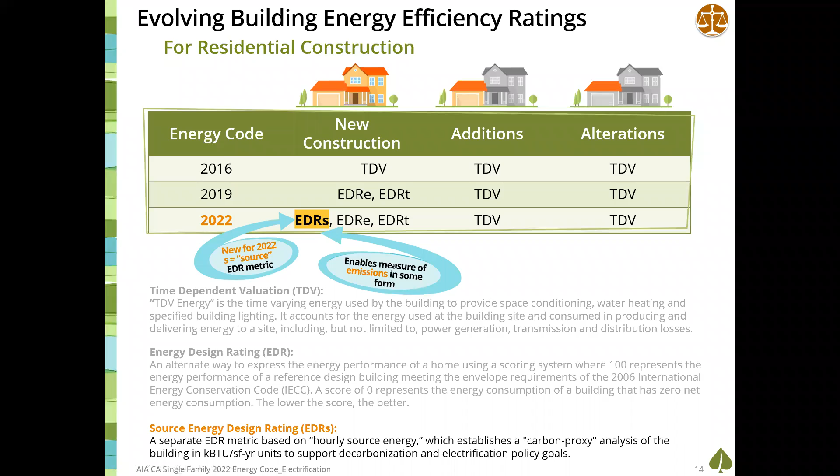So we want the right type of energy source being used with the right allotment that makes sense to a standard design, because that's what we're always being compared to when we use the performance approach: a standard design that represents your footprint, the location where the house is located, but meeting all of the prescriptive requirements spot on, and its associated efficiency metrics and source energy metrics of that standard design, in which it's just beautiful according to the energy code.

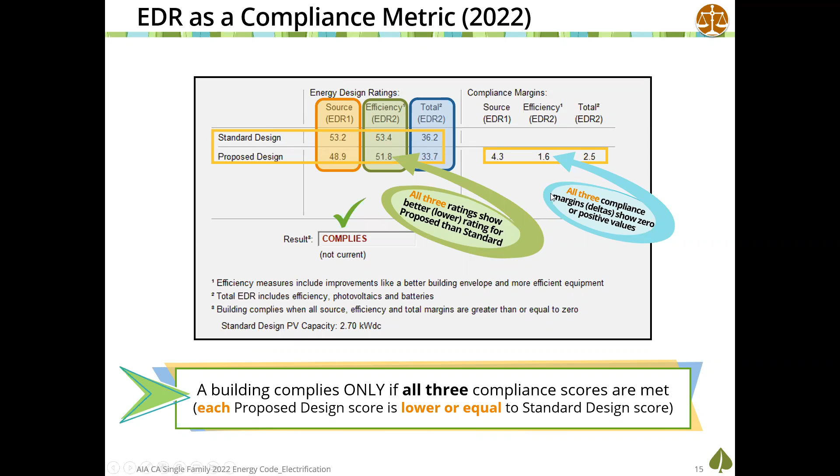So these three buckets are going to have to show compliance for that report to say building complies. So I might be passing with source energy and efficiency energy, but my total energy, which takes into account renewable energy sources on site, might not be passing. Then great, you did great with source energy. You're not using more than you need to, and you're using a source that has a low carbon footprint. Your efficiency is amazing. You have great windows, you have great insulation, but you don't have enough PV. And that is going to not be a building that complies to the energy code with this next code cycle. So there's layers associated with showing compliance for new construction in the next energy code.

I want to get a good idea. What is that climate zone? What is the energy code looking at in terms of efficiency measures and PV sizing that I need to consider before I start designing this home? So great tool out there. I hope you guys are using it already. Such a fun tool.

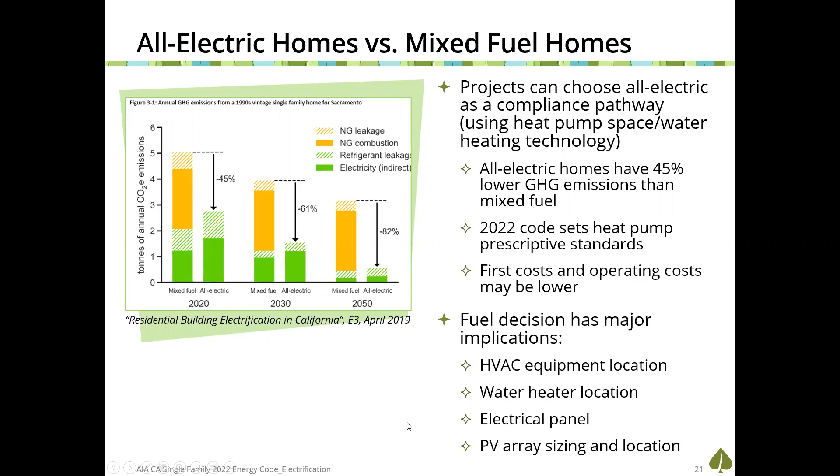And when we make decisions about our design, we need to consider fuel sources and the appliances, because you're about to see how it's going to affect how you design the building. So let's talk about what the prescriptive requirements are for heat pump water heating. It varies on climate zone. So here, all of California, the desire is to go to heat pump water heating. But there are some, shall we say, leniency measures associated with, well, if you want to use some natural gas, we'll talk about, well, what climate zone are you and what's that source? What are you using it for?

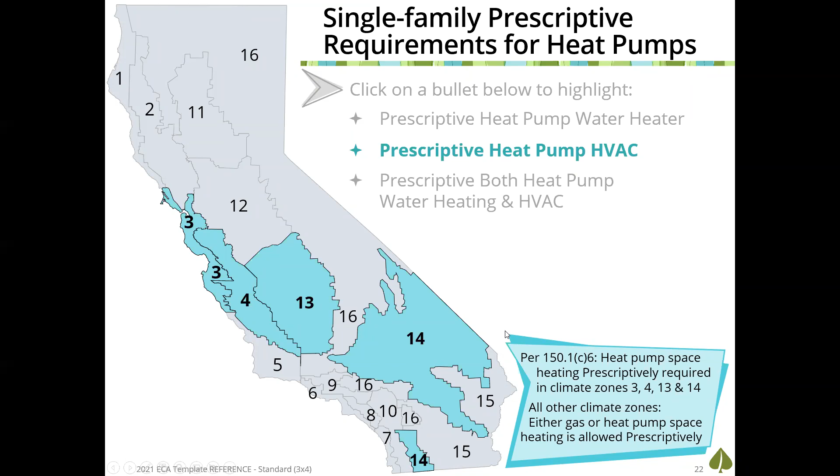And you will see here that in climate zones 3, 4, 13, and 14, which I've highlighted in a lighter blue, you can use gas tankless water heating in those climate zones prescriptively if you so desire, as long as you're using a heat pump space heater. You will see that heat pump space heaters are only prescriptively required in those climate zones, so you get some flexibility for water heating because you're using a heat pump space heater.

You know, Rebecca, someone's not muted, and it is causing a little bit of background noise. If we could just make sure everyone is muted who does not want to speak out loud or have us hear their background noise, that'd be great. I'm getting a little distracted, sorry. Bright, shiny noises.

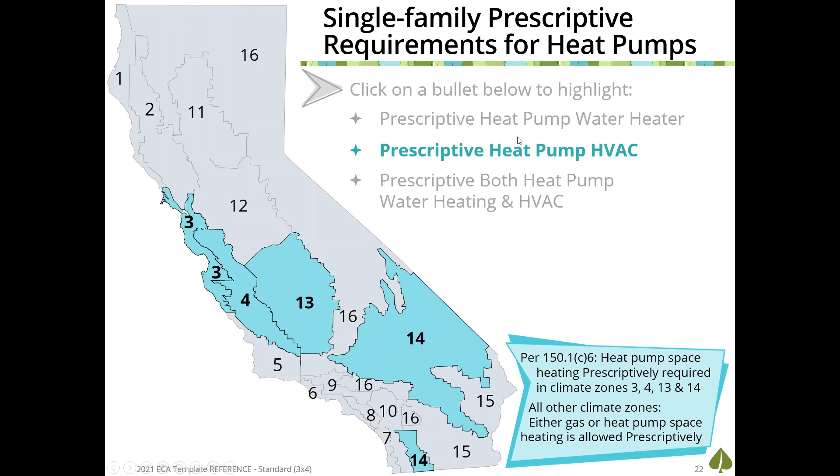So in climate zones 3, 4, 13, and 14, space heating is prescriptively required to be heat pump. And if you go there and you don't do a performance exception to that heat pump space heating, you do have the ability to look at using gas tankless water heaters if you so desire. Oops, I didn't mean to do that. That particular slide has some funkiness to it. Looking at both using prescriptive heat pump water heating, which we'd like to have everywhere, but we'll give you some leniency in 3, 4, 13, and 14, depending upon your HVAC system.

Across the board, everything's going to look better in your performance calculations using heat pump technology because of your source energy metric that's associated with this next code. So someone asked a question, what is the source of the electrical power? There's not enough now.

So our utilities have their own goals they have to meet, set by state code, of what their portfolio looks like that's generating electricity. And we've all seen that we've had some strains on the system as we've been converting our system to more of a renewable energy source so that electricity is green and it's not burning natural gas as much, because we still do have quite a few natural gas plants here in California, but the utilities again have their goals to start converting those and providing more energy sources to their portfolio that have no carbon footprint.

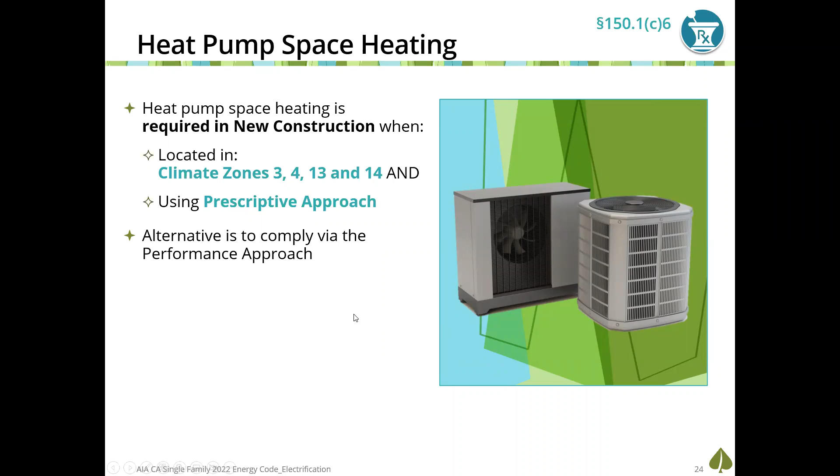Let's talk a little bit deeper about those heat pump space heating systems. As I said, in climate zones 3, 4, 13, and 14, they are going to be prescriptively required, but across the board, when you use the performance approach and you want to use gas space heating, it will affect your source energy metric. And one of the tools that they have given us, and it actually happened mid-code cycle for the 2019 code cycle, is a variable capacity heat pump performance compliance option.

And I really wanted to talk about this with you guys about design considerations, things that maybe you might want to do some research in and find out more about, because for these variable capacity systems that meet a very specific design criteria, and here's our design criteria that has to be met, each habitable room has to be directly served by a ducted or ductless indoor system.

All habitable spaces that exceed 150 square feet are going to have a thermostat that controls the environment of that space. So we have to be thinking consciously of what's a habitable space in my building, what is a non-habitable space, what's the size, and how am I giving it its own control system of how it's maintaining its temperature. And this entire thing is verified by a HERS rater.

But going back here, this credit is only engaged in the performance approach, and it's pretty humongous. I gotta tell you, I've been able to provide a lot of compliance flexibility for projects by looking at a variable capacity heat pump system, which is most commonly provided via mini split systems. So really look into mini split systems and variable refrigerant flow systems. So there is technology out there that is pretty amazing, and it's not expensive.

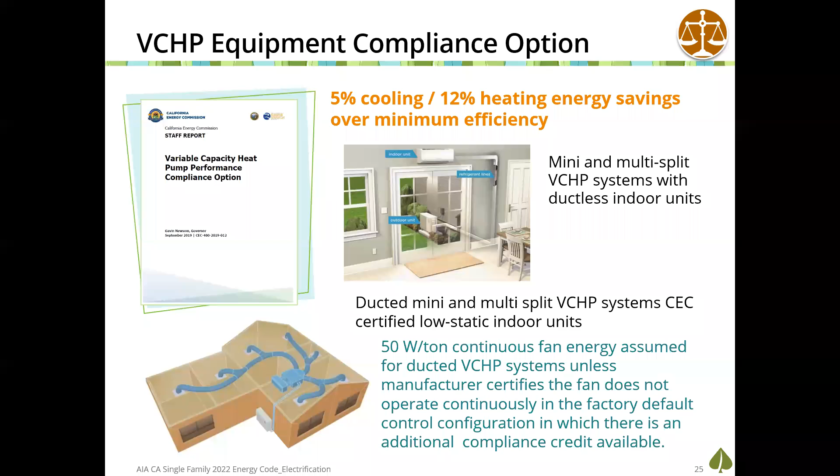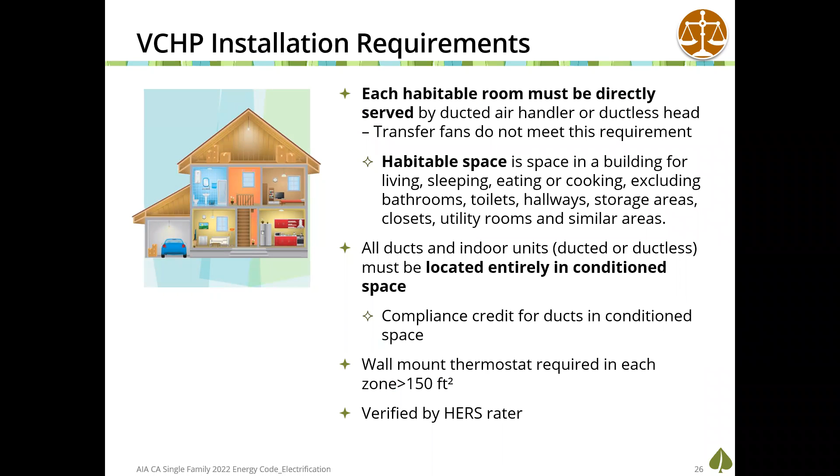It's not like a hydronic space heating system in which I've got warm floors throughout my entire house. That's a pretty expensive system. This isn't, because of its ability to spot cool, shall we say, specific rooms when the people in the room go, hey, I'm setting the temperature because I'm here in this room using it and I want to be comfortable. But I'm not sleeping in my bedroom right now, so I'm not going to set the temperatures there. I'm going to make sure those are temperatures in which I'm not using more energy than I really need to. So a really great tool that they've given to us under our belt.

A little bit more about water heating. There are many different types of heat pump water heaters, so you're going to have to do research on heat pump water heaters. 240 volt heat pump water heaters are what's really supported by the energy code, because it has a quick recovery rate. It can produce that hot water ready for that next person that's going to take a long shower quickly.

But there are a lot of people who are getting very concerned with how much load they have in their homes, and how can we think about the design of the loads of the home by taking into consideration, do we really need a 240 volt water heater? Maybe 120 volt will work, depending upon the desires of the homeowners of when and how much water they need.

The solar backup system. So this is a PV system that's tied to and dedicated to an electric resistance water heater. So I don't have any flue, and it's a pretty amazing system.

Does need to be an approved system by the Energy Commission, but I've seen some of these are pretty amazing, and I'm seeing them quite often used with ADUs. Now, you do have some exceptions to the heat pump water heater. Remember that if you want to go gas tankless and not take a penalty, in climate zones 3, 4, 13, and 14, that is possible, but that means you are using a heat pump space heater.

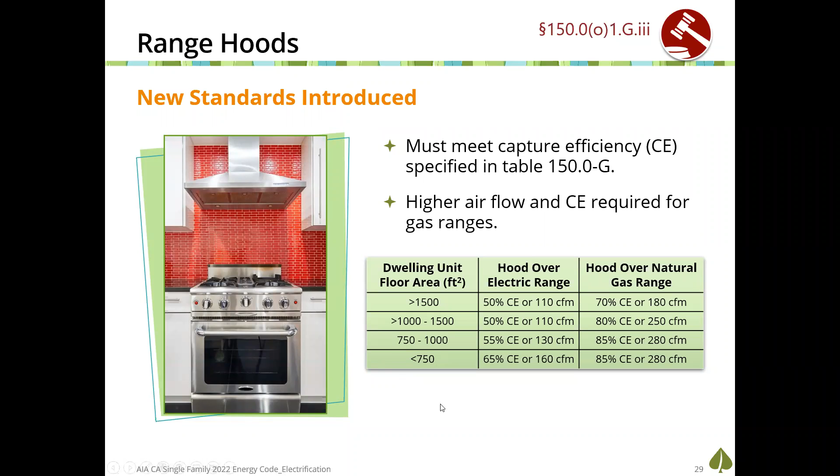We want to bring that air out. We want to flush out that kitchen with more air changes than if that same hood was serving an electric cooktop. So do be aware, if we're using gas cooktops, we will have alternative requirements for our kitchen hoods, which will require a higher airflow rating, which will be verified by a HERS rater.

Now, if you want to use natural gas anywhere in the home, let's say you successfully were able to go, I want a natural gas water heater. And I was able to, in that performance approach with increased building efficiency and so forth, and showing that my source energy is in compliance to how much I'm allowed, I pass. Yay. You do that with the furnace. You do that because you want a gas cooktop.

You have a gas dryer. But that means you're going to put in an electric infrastructure for future electric appliances. So if you're going to put in that gas tankless water heater, this is an issue. All of you need to be considering this.

You need to design into the home a 2.5 by 2.5 by 7 foot space that is accessible for a future tank heat pump water heater. And part of what you're also going to put in that 2.5 by 2.5 by 7 foot space that you reserved is the electrical infrastructure for an easy install of that heat pump water heater.

And if the space you reserved is within 3 feet of the water heater that's there, that gas water heater, you have one set of requirements versus if you decided to reserve that space greater than 3 feet from where the water heater is. And this is in part because the further away the water heater is from that hot water piping, you're adding more energy load as we have to flow through the hot water pipes longer to get the hot water to the source. So there is going to be a cost and a design criteria behind wanting to go gas tankless water heaters.

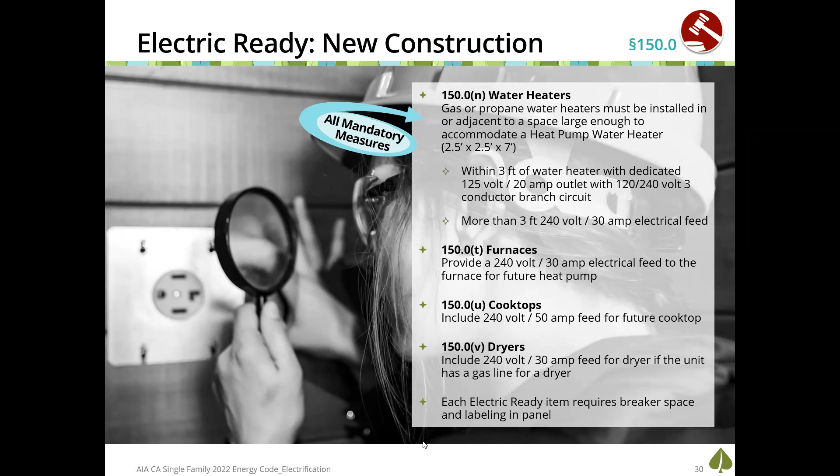So, being conscious of what does that mean to the electrical infrastructure of the home, to the service size to the home, and the cost. So the homeowner's paying for 2 services, gas and electricity. That's a cost. Is it a cost that they really truly are conscious of? Is it a decision they're making? And you, the designers, need to be helping support that.

So Emery's asking, how loud are the exterior components for heat pump water heating systems? Worry about neighbors complaining. So I put in a variable heat pump system. I'm going to say it out loud. I use Mitsubishi. I really love their products. I'm not supposed to say particular things, but there's Daikin and Fujitsu. They all have great products out there, but I just know my experience with mine. I can barely hear it. Yeah, I'll go out there and I'll hear more of a swooshing noise because there's a big fan associated with it. So also be aware there's a fan and there it is pushing out cold air.

So we really need to think about where we're putting these systems because they are pushing out cold air as they're drawing out the heat from the air. And my neighbor has an air conditioner that squeals and is so freaking loud every single time they turn it on. And I can never open up my windows if they have their air conditioner on, but that is not the case for my heat pump space heater and my outdoor unit. Now there's lots of products out there, but in my experience, because that technology has evolved and the industry is ready, it's pretty amazing. It's pretty good stuff there.

What will the utilities be using for constant base load generation? There's a lot about our portfolio I'm not going to get into deeply here because this was all about designing a home for electrification. A lot of our portfolio currently right now is natural gas, but we have had goals at a state level. Remember I said at a state level, the utilities have renewable energy goals they have to meet, and the utilities have exceeded those goals, which I think is 40% of the portfolio being provided with renewable energy. And by 2045 they have to be 100%. So there's some aggressive goals happening on that side of the fence regarding the generation of the electricity that we're using.

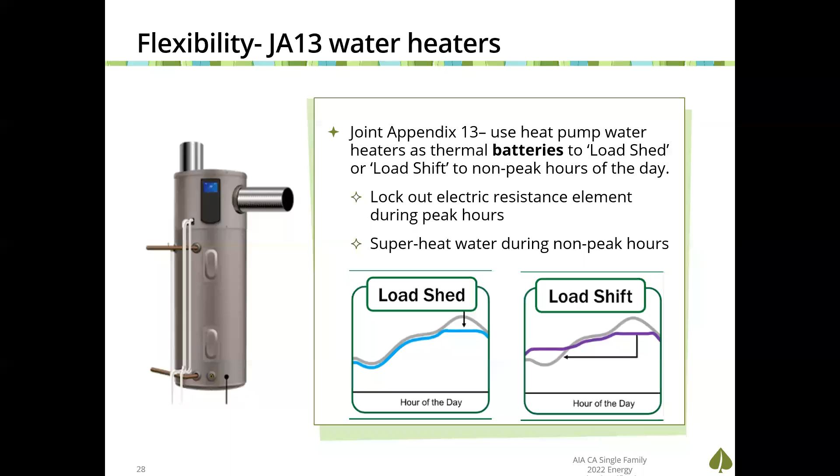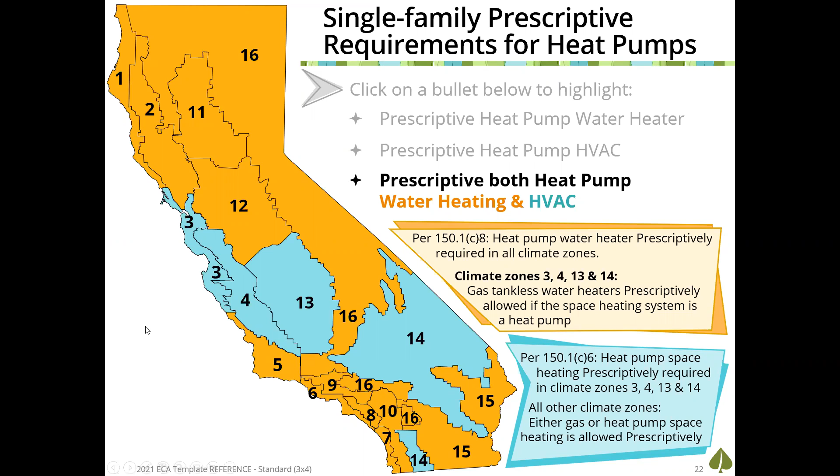There is some leniency associated with these climate zones based on standard equipment, but there is some great cold temperature heat pump equipment out there. And if you're going to be designing in 16, 14, climate zone 10, these are areas where it gets really pretty cold in the wintertime, and we're thinking about heat pump technology, thinking about placement of that technology, and thinking about the right technology for the application, and really looking into the cold environment systems that are out there.

So I jumped around a bit here. So what I want to do now is move on and start talking about our solar and battery requirements of this next code cycle, and go back and handle some of the questions I potentially haven't answered yet. Okay, so let's talk about PV. But before we can talk about PV, we have to talk about SARA. And SARA is the available solar access roof area associated with the site.

Current code, we only look at the roof of your conditioned building, and that's it. We don't look past that roof, even though you could put the PV system anywhere you want on the site. This next code, we look at SARA, and that includes not only the roof of your conditioned building, but any roofs associated with covered parking areas, carports, any other buildings that are being built in conjunction with that permit, such as a detached garage, a storage shed, a separate pool building. All of those building roofs are looked at to see if they can structurally support a PV system, and they are considered as where and what we have available for a PV system.

Now, what we don't include in our available area are areas of those roofs on the site that cannot show they have at least 70% annual solar access. So over the course of the entire year, as the sun is going over that location, at least 70% of the year they've got good sun. If it's less than 70%, then we don't include those areas. And if you think about a heavily wooded lot, potentially PV might not be required.

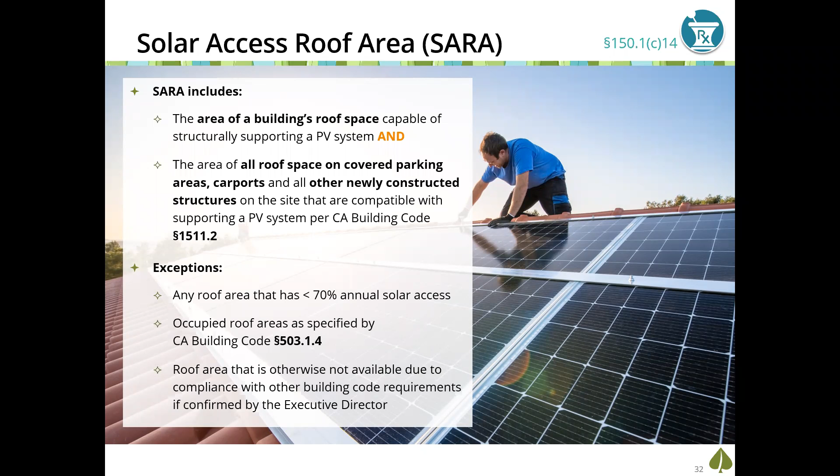Now, there is discussion at the CEC of putting out a pre-approved Executive Director list, such as the fire code access requirements around PV. We can't cover the entire roof with PV. The fire code doesn't allow that. Egress requirements that we have around mechanical systems. We also always want to consider that any shaded areas, if I have obstructions, those obstructions are taken into consideration in terms of, do I have that greater than 70% annual solar access of the space?

So I had someone say, hey, could you please post the solar access tool? I can't multitask that well. So that might be something that I provide after the fact. But if you go to the CEC website and you just put into the search solar access tools, it will take you to the site that lists all of the current approved solar access tools. There's at least, I think, 6 or 7 of them now, and they're adding to them all the time.

I got to tell you, I'm an Aurora fan. That's what we use here in our office because it really allows me to bring in that future roof design into the site and look at how the sun is going over that site. But there are other tools. HelioScope is another really popular one that I've seen. Thank you so much to someone who provided that link. I very much appreciate that.

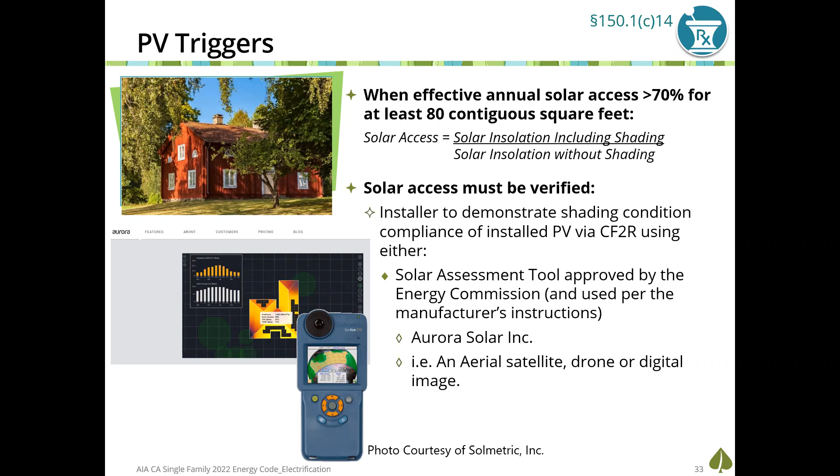And, you know, you're either going to do this yourself or you're going to hire someone to do it. I'm an energy consultant. This is a service I provide to my clients of doing the solar access report of the site using the roof design of the project to take into consideration, are we exempt from PV? Not only are we exempt, but where's the best location for it?

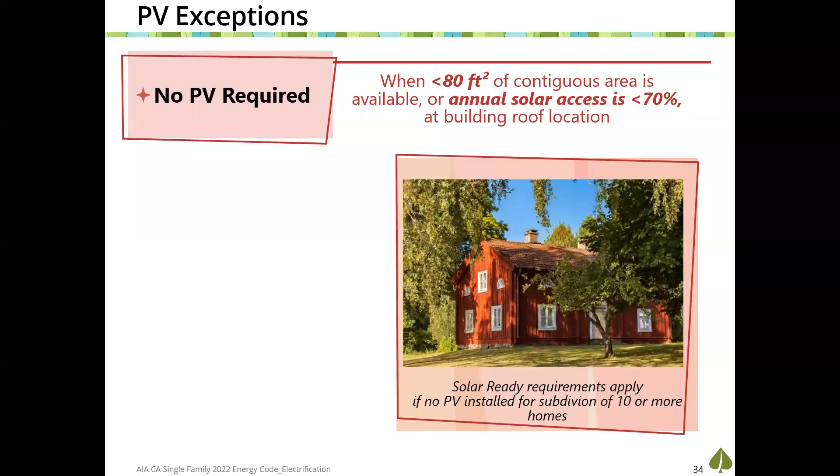Now let's talk about when we don't need to have PV, even though we have great annual solar access, okay? So this would be because of high snow loads that have been dictated by the local authority having jurisdiction, that there are structural issues if you put PV in certain areas of their jurisdiction. So you do need to check with your jurisdiction. There is not across the board, hey, you have snow, you're exempt.

Because an example is Truckee. There are areas of Truckee in which the snow load exception will exempt you from PV, even if you have amazing annual solar access. But there are many areas of Truckee that you are not exempt, and you will have to provide that PV system, even though it does snow sometimes. So please, please, please check with the authority having jurisdiction about exceptions associated with snow loads.

There's a brand new exception for this next code cycle that if we do the calculations and that standard design, remember that one we're always competing against, that's the perfect prescriptive building.

If that standard design says, hey, you have less than 1.8 kWdc required as your minimum PV size, you are now exempt from PV for that building. It's not based on your proposed PV kW number. This is all about the standard design.

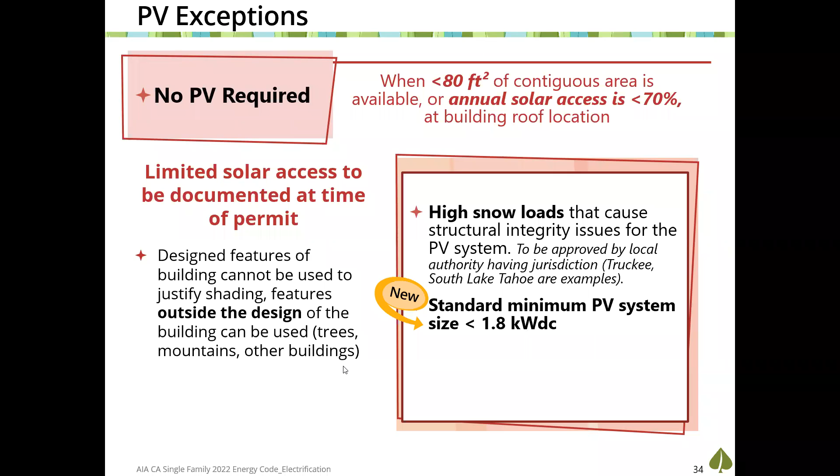And if by chance you go prescriptive, I really don't talk prescriptive because it's not how 99.9% of the people out there do compliance for new construction, but there is a methodology, a formula for the prescriptive method also. Now, this is going to be a very small footprint. So this is all about ADUs. ADUs are small homes, tiny homes that have a very small conditioned floor area in a mild climate zone that might then give you that exception.

So a lot of people ask me, what is the PV kW based on? Because it's not a big number. That PV kW is based on a mixed fuel home. In fact, part of what we're trying to move away from in California is a mixed fuel home, but to keep things fair and to not overwhelm the grid with PV kW production, because that's a major part of the development of the code, is not only how are you designing your site, but how is it affecting the grid and supporting grid harmonization.

So it is based on a mixed fuel home, so it will not take into consideration the energy use of a heat pump space heater or a heat pump water heater. It only takes into consideration the electric use of your air conditioning and some other appliances, and kind of looks at building efficiency too.

There are different ways we can go about promising our PV design. I don't want to do the PV design now. It's going to be done as a deferred submittal. It's going to be done under a separate permit. I really don't want to think about it right now. But you have to have that PV considered when you go in for your building permit, and it has to be installed before the final occupancy permit. And there are different promises we can make.

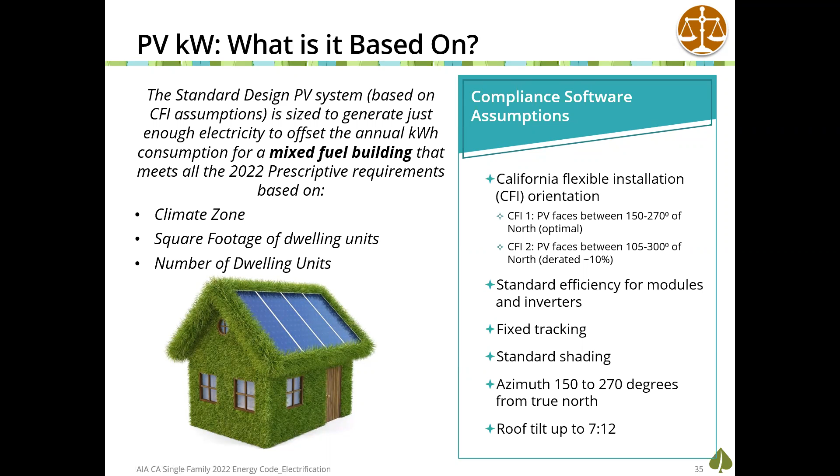I'll promise that we'll put PV anywhere between 150 and 270 degrees on the site because I have great roof access for that. You get a smaller PV kW size if you use that methodology. Or you might say, I need more flexibility than that, and I'm going to promise between 105 and 300 degrees of north. So there are different ways you're going to think about how to design in my PV design.

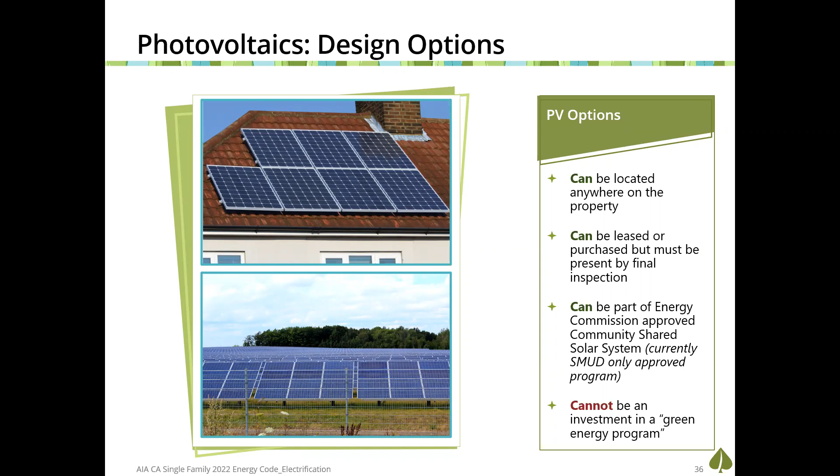You can locate your PV anywhere on the property, as long as it's the property that it's associated with. It can't be the neighbor's property. You can lease or purchase the PV. You can be part of a CEC community shared PV system. Currently, the only one approved is in the SMUD territory, but it can't be because you promised to invest in a green program. I get that asked a lot. That's not an exception.

What do we need to consider when we think about PV design? Well, the energy code's requirement is a little teeny PV kW like this big. What else might you want to consider now that we have the investment on PV on site? What loads should you consider? EV, electric vehicles, pools, spas. They have 100 TVs. What is it about how they use their property that we might want to take into consideration as we size our PV systems?

Oversized systems: if you oversize it so much where the local utility says, whoa, you went way bigger than what we're able to handle, and there is a formula put in place by the CPUC, once you exceed that formula, the local utility can say, we're not going to pay you back for any unused energy because you are putting a system on your site that's way too big for your needs. So do be aware, oversizing is a thing and it's not encouraged.

Get your PV contractors and or designers involved early. I'm hoping you're seeing, even when we're trying to figure out the best place to put a building on the property, we should be thinking PV. When we're thinking about roof design and the orientation of our different roof surfaces, PV should be considered.

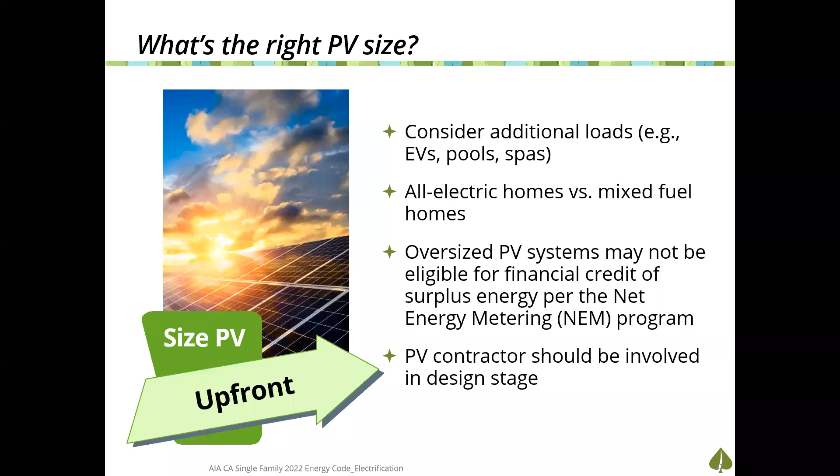Now, battery ready is brand new to this code cycle, and it's very similar to electric ready. It's not that a battery has to be installed. It's that we are setting up that home for a future battery system by making sure the electrical infrastructure is in place. They have the ability to decide how they're going to use their battery.

They have two design options, and they're making sure the infrastructure of what outlets are being served by the battery when the electricity goes down and the battery ramps up, what is being used in the home. You've saved enough space for that battery, and you have an electric infrastructure that can support it, okay?

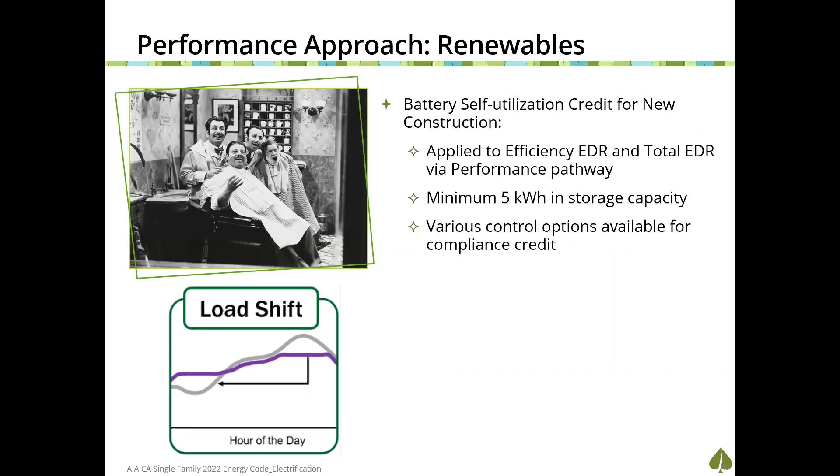Currently in the 2022 code cycle, you can take credit for installing a battery. And you don't get that credit until the battery is at least 5 kWh or larger. And also, if you have an installed battery, you don't need to meet the battery ready requirements. So there might be that cost, hey, we don't have to do the battery ready, because we're already doing it. And then it gives us some flexibility in our performance calculations.

Things you need to be aware of when you're thinking about where is this battery going to be located? Where is the battery ready requirements? Where am I going to save a space? Think about your occupancy in the allowed locations by the building code and the fire code. Think about how the fire code has requirements in terms of the fire detection associated with the technology and the size of the battery. And ventilation of these battery systems is very important, as is dictated by the mechanical code.

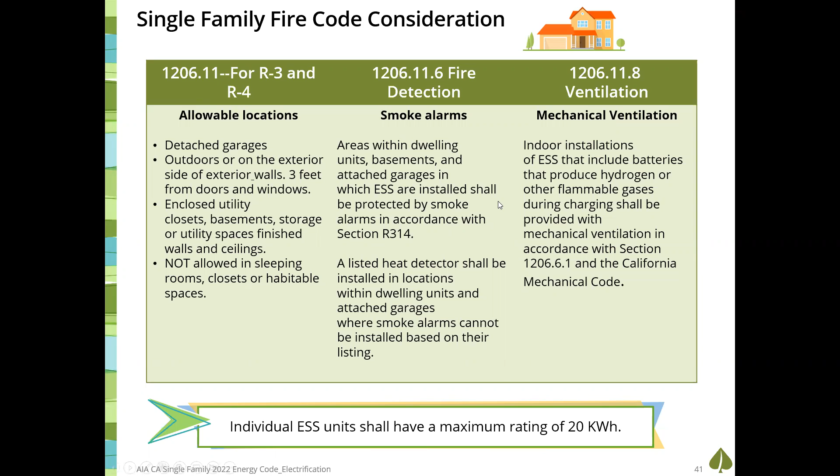So when we're talking battery, the energy code introduces the subject, but then we need to be aware of all the building code requirements, residential code, fire code, mechanical code, that are going to dictate the design parameters. Now, there are criteria specific to the energy code, again, about what type of future battery system they might choose and how they use it. What circuits must be prepared to be served by that future battery?

And here's a big one. The main panel has to be a minimum 225 amps. And this does apply to newly constructed ADUs. So this can definitely be something we have to consider. There are lots of incentives currently right now if you want to consider changing out existing gas equipment to heat pumps. Now's the time to take advantage of them.